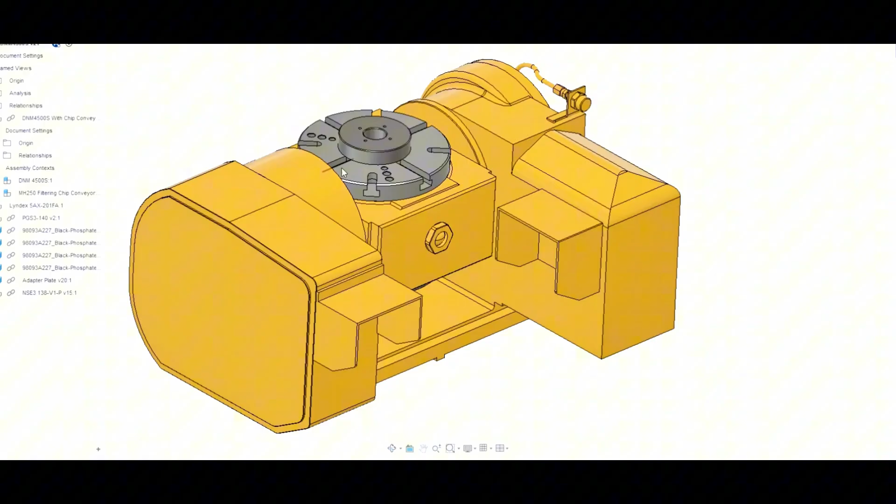So I'll just kind of walk you through how that installs because it comes as a separate item, the rotary joint, and Lyndex doesn't install it for you. So if we hide the machine here, what you'll see is the model from Lyndex does not come with a lot of detail, but there is a bolt pattern back here. And so the rotary joint comes with a spindle that slips through. It's a precision fit through the center of the platter, which is nice because it makes this boss essentially into a locating boss for your workholding adapter, whatever you want to put on top of the platter.

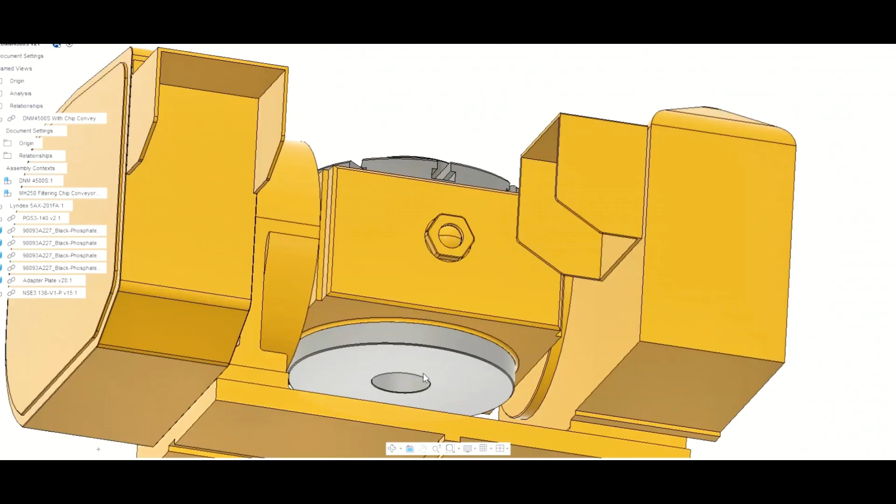Once you slip the spindle through, there's a rotary nut that goes on the backside with your four media inlets slash outlets. And then the rotary nut is held in place by a little finger. What you can't see here is that this actually has a static portion around the outside and a revolving portion around the inside. And so the static portion has a couple of bolt holes. You bolt the finger on, the finger interfaces with the rotary nut, holds it static, and then you've got four air lines coming off the bottom of the rotary nut to a little manifold block that bolts to this base casting.

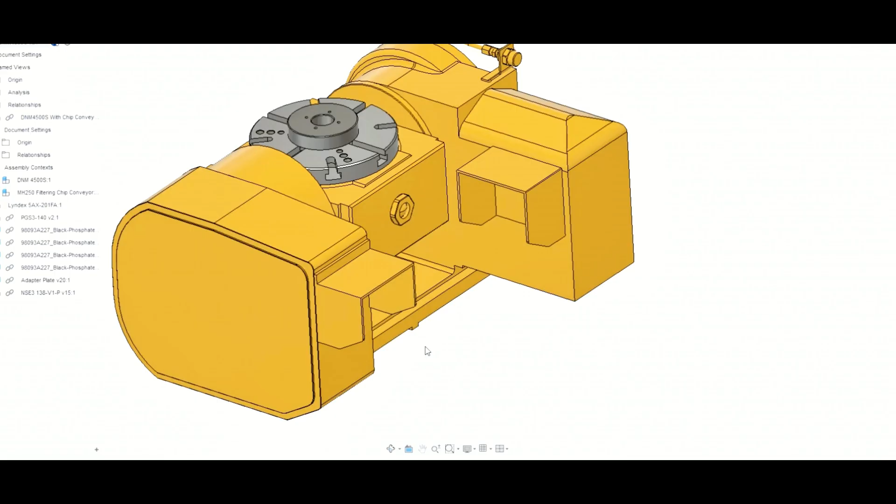And then from the manifold block, the kit also comes with a bunch of pre-cut hoses with some shields and some retractable hanging cables that bolt to the top of the machine enclosure so that any extra slack that hangs here as your indexer goes left and right is kept from getting caught under the machine or sucked into the chip conveyor. And those air lines, four of them, go up to some little nipples that are in the top of this white sheet metal here, not depicted in the model. But that's all you get from the manufacturer.

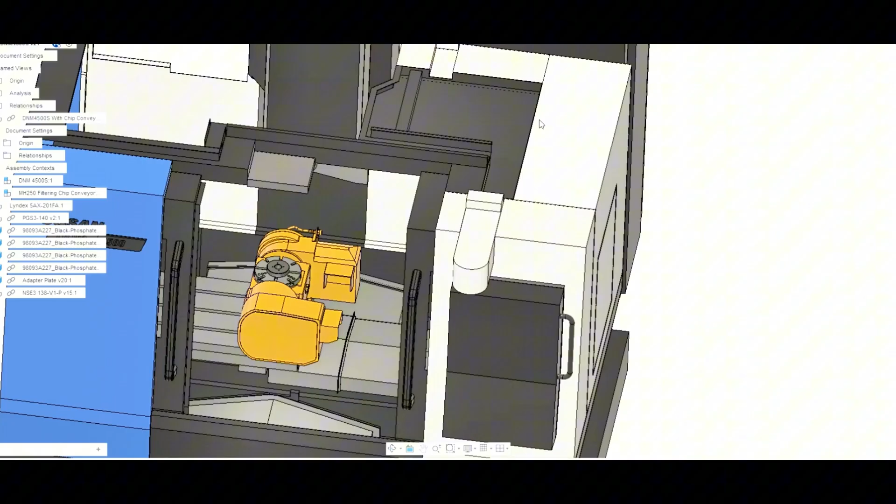So from there, it's up to you how you want to actuate it. We knew we wanted to do manual actuation initially, and that's worked really well for us. So what we ended up using was this foot-operated switch that we found on McMaster. And it's important that you buy the right switch with the right flow pattern because not just any switch will work.

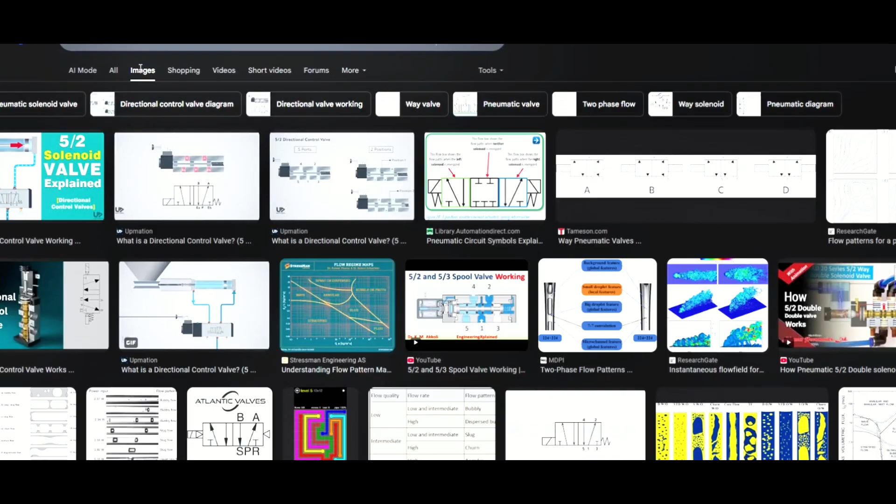So this 5-2 flow pattern, essentially the way it works is it allows one to flow while it allows the other one to vent when you press the switch. And then when you release the switch, they swap. The other one flows and the opposite one vents. And the reason that's important is because a lot of these pallet systems have a turbo function. Basically, they're air unclamp, spring clamp.

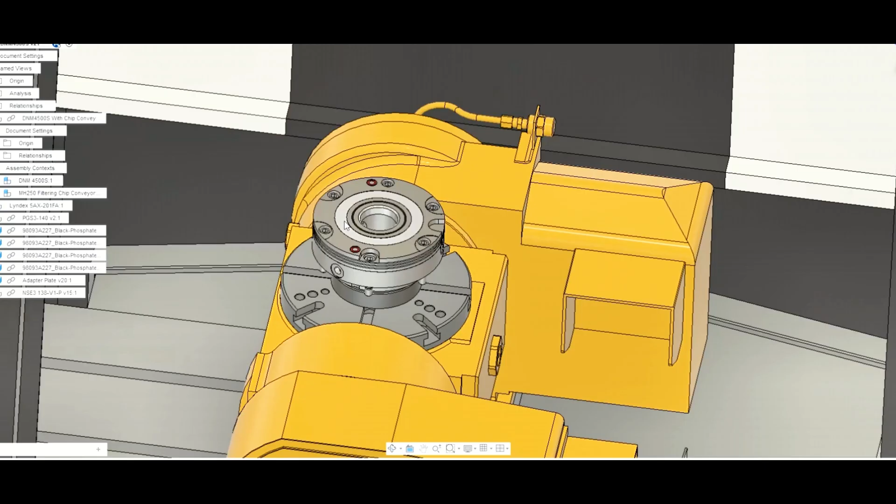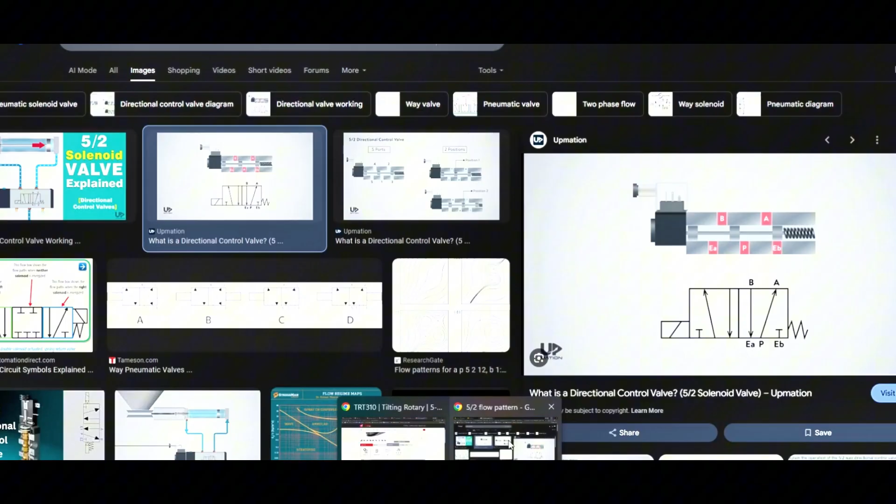But if you plumb the turbo function to the up position of your foot switch, then when you release the pedal, it actually brings in that turbo air, which introduces extra air to the backside of the platter, and it increases your clamping pressure, increases your rigidity, reduces the chances of a pullout, improves your finishes, all that good stuff. So using this switch or something with a 5-2 flow pattern is important.

So once you've run the plumbing up to the sheet metal, you can put a little manifold up here with a pressure reducer. You can bring in ambient shop air from the back, and this is what we've done. So you've got a couple air lines coming off your rotary, air coming from the back, pressure reducer, which allows you to really dial in your pressures.

We use these air vices quite a bit from Schunk, and so by specifying pressures in our setup sheets, it allows the operator during setup to climb up there with a step ladder, adjust the pressure reducer to the required pressure. And because we've used either engineering calcs or pressure gauges to know exactly what force we're getting, it is as though we've used a torque wrench on an old school CNC vise to set the clamping force for our part.

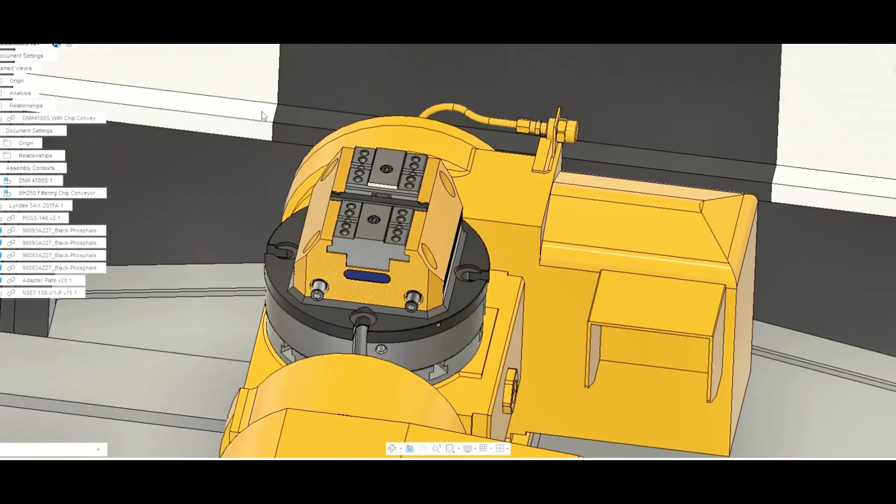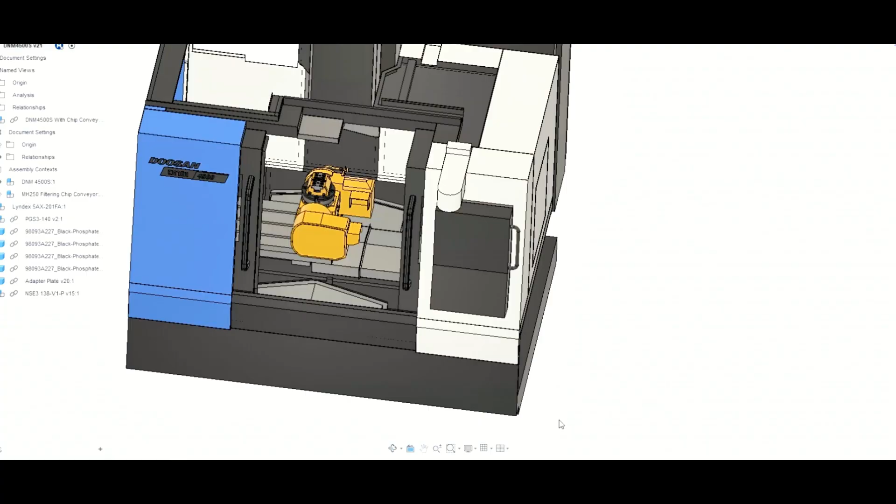And then from your manifold, you run a couple flex tube lines down to your foot switch, sits here on the floor, and it works great. We've run this for thousands of hours, tens of thousands of parts. Now, if you want to go fully automated with an M code and be prepared to integrate with a robot cell, you can do that. We've elected not to do that yet, but we plan to down the road.

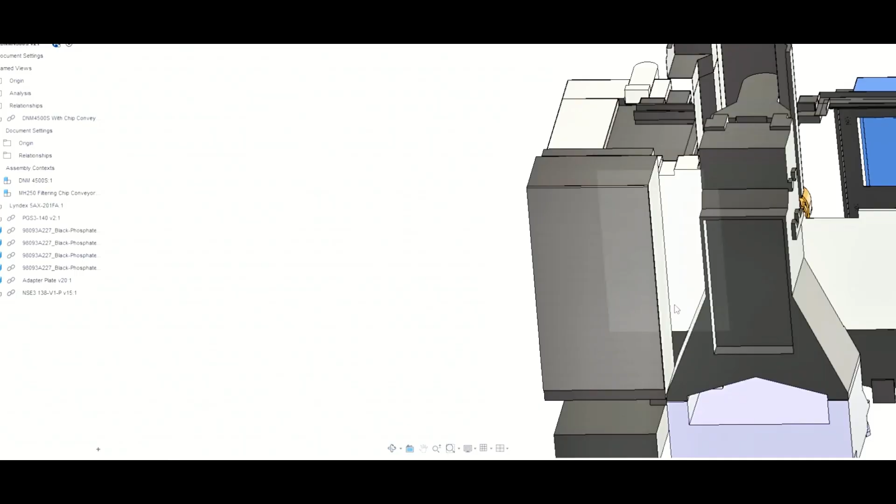The nice thing about the foot switch is there's nothing stopping you from automating in the future. So you take the system that you've already developed, you disconnect the foot switch, you run your two airlines back to the side of your electrical cabinet, and you install your solenoids, which your CNC manufacturer can help you spec out, and they are equipped to make those solenoids interface with the machine control. That's pretty much it for this machine.

The next machine I want to talk about is our Mazak VCU-500A 5X. And this is a great machine to highlight because, first of all, it is a full 5-axis milling center. So there are some new challenges associated with this one. But additionally, there was no solution provided for us by the manufacturer. So we did this one entirely from scratch on our own. And so I'll be able to walk you through that.

It is worth noting that Mazak does offer a rotary joint kit. You can buy it from the factory. I think it's a $13,000 upgrade, and it is actually field installable. So they quoted it for us at about 13 grand when we bought this machine, and they offered us, I believe it was a 16 to 20 week lead time. So we ordered it, and while we waited, we worked up the solution that I'm about to show you.

And what ended up happening was, first of all, this worked so well, we didn't feel like we needed the upgraded solution. We didn't need to spend the 13 grand. But also, after 20 weeks went by and we had heard nothing from Mazak, we reached out and there was no estimated completion date. Now, this isn't a knock on Mazak. They're great machines, but they know where their priorities are. They want to ship new equipment. They're not necessarily as motivated to send someone like me an aftermarket option that wasn't initially equipped on the machine.

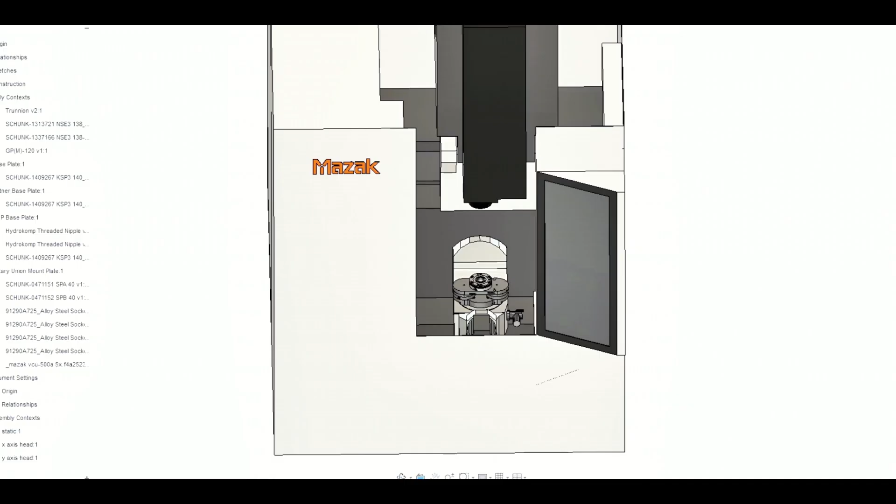So make of that what you will, but it is worth knowing that if you're purchasing a new Mazak and there is a provision for automation prep, I would highly encourage you to invest a couple extra bucks to provision it that way, because it'll save yourself quite a bit of heartache. Having said that, the machine as we received it was not provisioned with air through the trunnion.

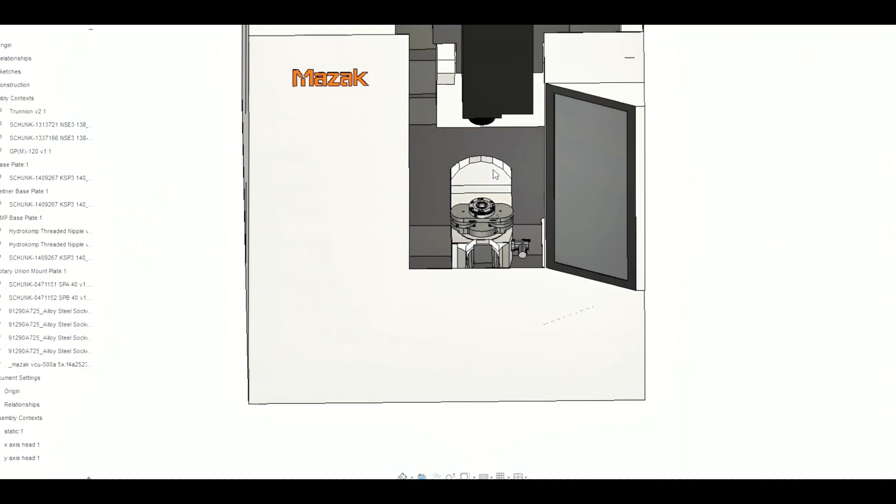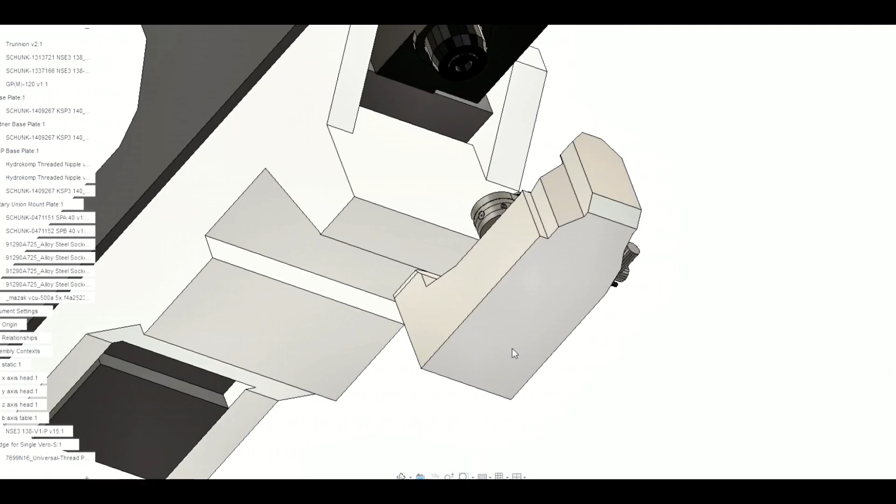Now, I don't want to get too into the weeds with this, but if you look at the actual machine, if you roll the table all the way up on its side, you'll see that underneath the trunnion there is a, let me see if I can turn this off. I don't think it'll show up in this model, and this is not accurate either. But up inside the trunnion, there is a panel here, and if you remove that panel, there is a pathway through the back of the casting and into the machine enclosure, where presumably the manufacturer would route hoses.

We didn't go that route because we weren't really interested in tearing into the guts of this machine and causing ourselves more trouble. So what we ended up doing, first of all, we needed to have a more accurate model of the trunnion.

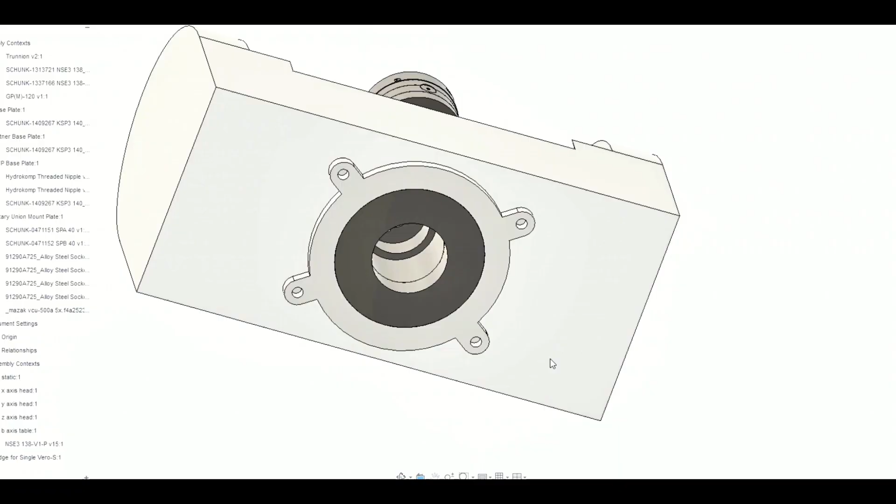So we did a little bit of reverse engineering, not fully, but we got a little closer to the real deal, some important diameters, a bolt circle that we plan to use, and I'll walk you through that later. But we also had to stop and identify what rotary joint we were going to use.

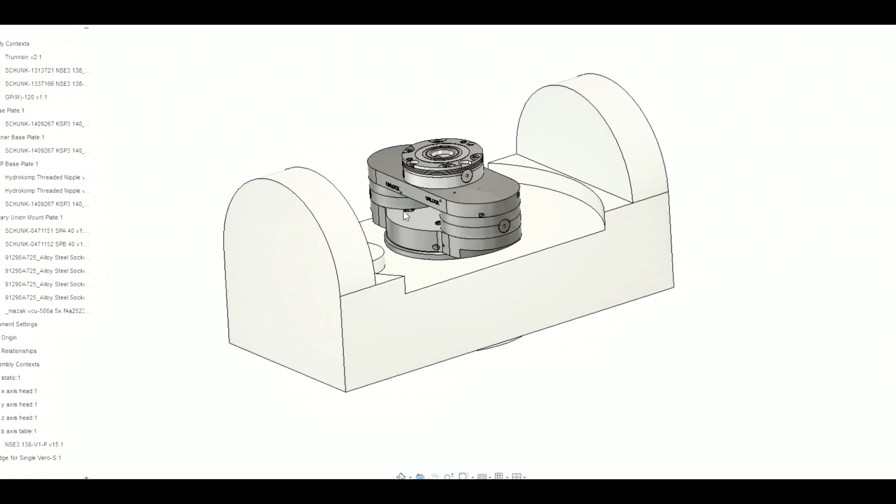Now, this is a low RPM application, right? This is not going to do any turning. It's not a turning mill. So it's only ever going to index about the platter. So we're talking a couple hundred RPM at most for intermittent movements. So because of that, we were able to find a fairly simple consumer grade rotary joint from DSTI.

And I think these guys go for $300-400, and they are on the shelf ready to buy. Super straightforward. Pressure's not an issue, speed's not an issue. And suitable media, we're using air for everything.

So we ordered this, and then we knew we had to get air from the backside of the platter up through the trunnion and into the table. So what we ended up doing was sinking the rotary joint all the way down into the hole through the platter. Because the diameter was large enough, this wasn't an issue.

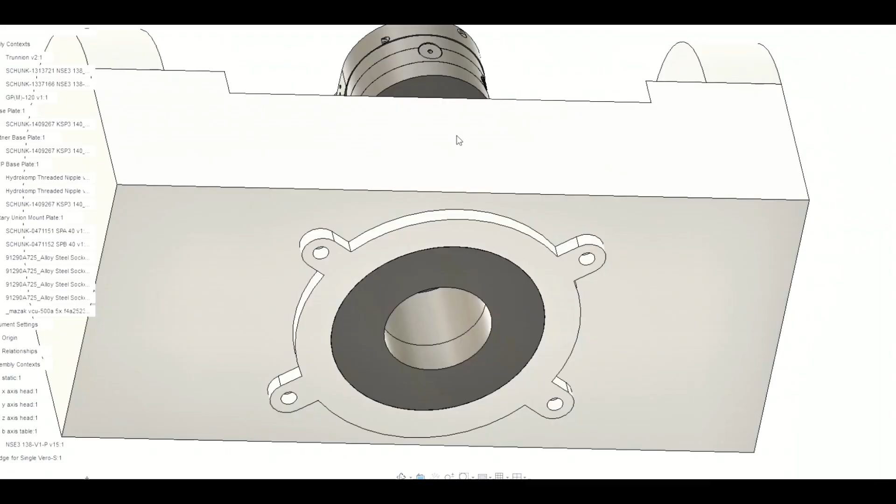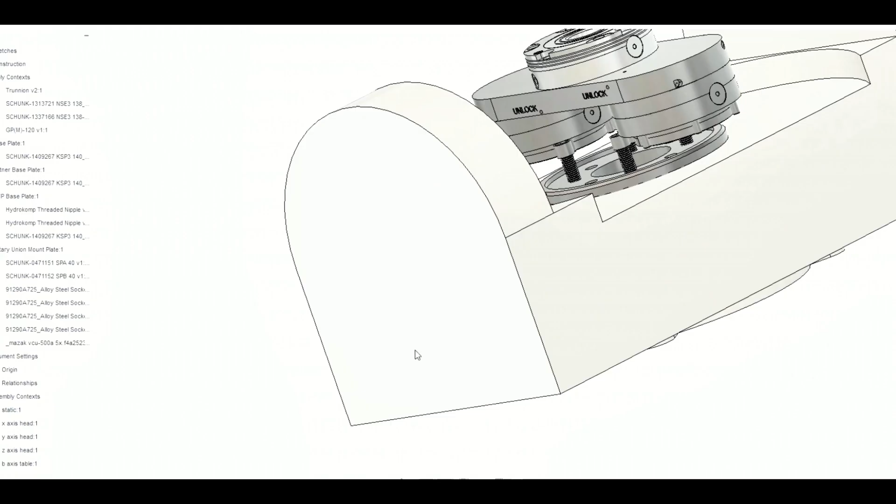So what we did was we fabricated this base plate from scratch, piece of steel, tool steel, or if you want to go crazy, you can get something hardened, but it's not necessary. This is a precision slip fit, and it's worth noting at this point, and this is really important, we did remove the factory table, and this bought us like 2 full inches in the z-axis.

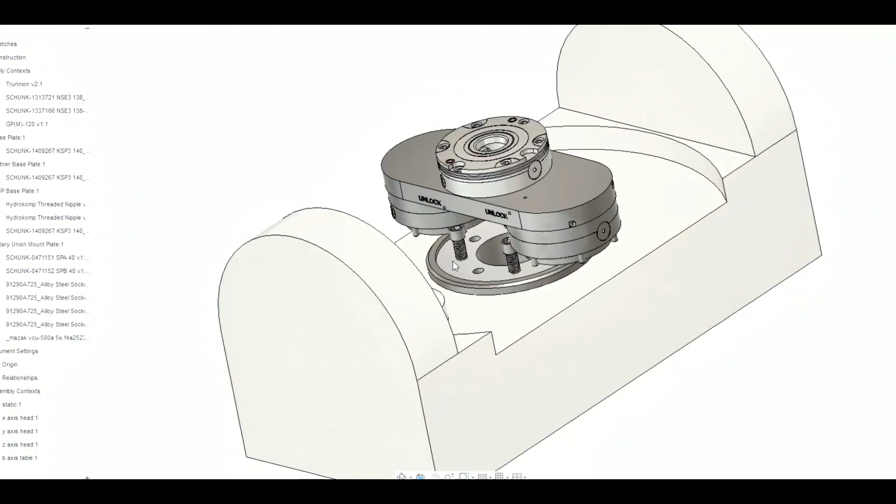So if you're planning to integrate and you know that you're going to run automated work holding forever, I highly encourage you to take a gamble and remove the existing platter, because many of these machines are not going to have exposed bearings underneath the table. They're going to have some kind of pocket like this. And there's no reason not to gain yourself a couple inches of Z, some rigidity, and ultimately Z turns into X, right? When you turn this thing on its side.

So this machine is actually more X limited than it is Z limited. So by slamming the part as low as we could, we got closer to the center of rotation, but we also kept our taller parts away from the left-hand limit of the machine when it's fully indexed in the B axis. So yeah, we made the base plate, and this is the challenging part of this project. I know that might sound crazy.

Hang on, I gotta turn some stuff off here real quick. You go away. And all right.

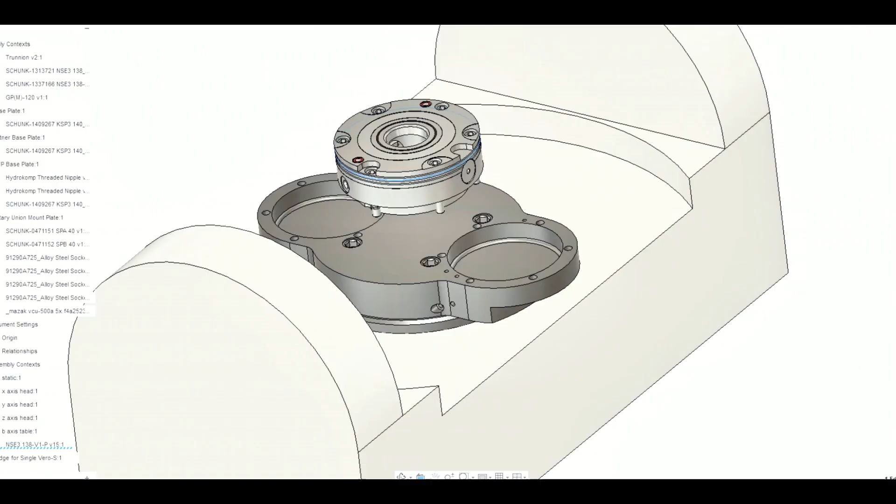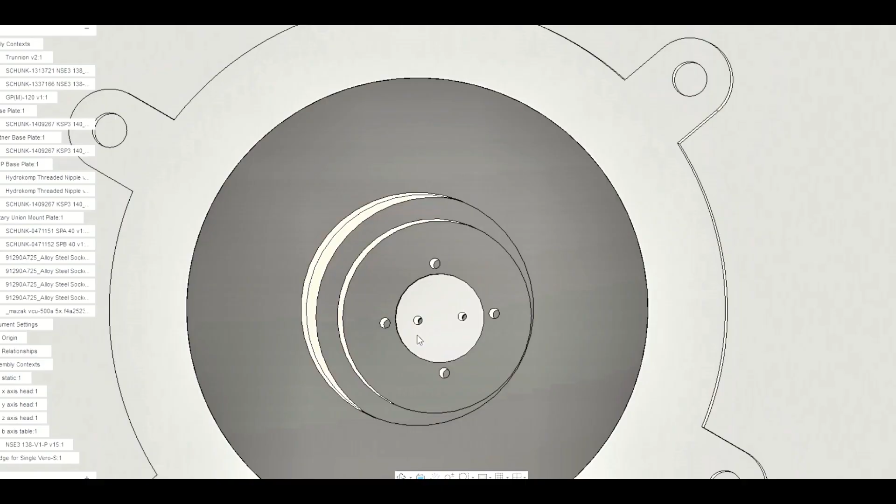I know that might sound crazy, and if you're used to deep hole drilling, gun drilling in your shop, then pay this no heed. But for us, these long cross holes to get air from these ports where our rotary joint had like a flush interface with O-rings out to the holes that actuate and vent our Schunk pallet bases was a huge amount of work.

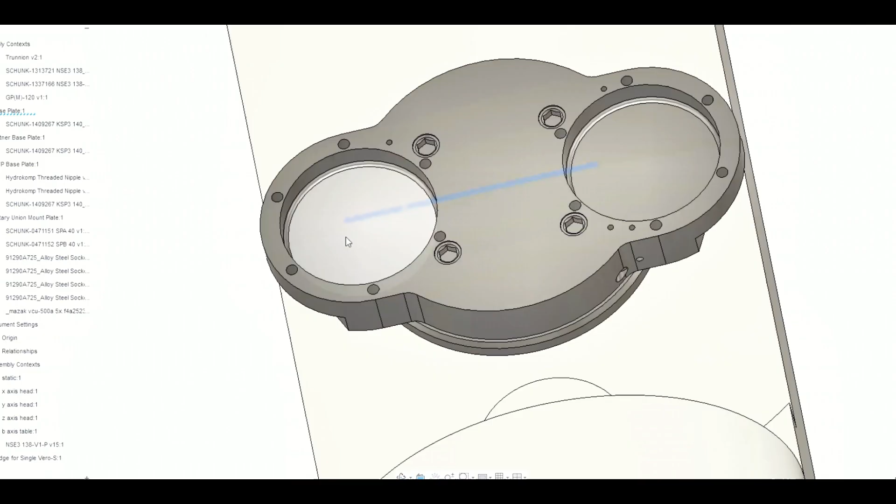But basically what we ended up doing was buying some gun drills off of McMaster. Obviously you have to pre-start the gun drilled holes. And I think our deepest hole here was, I don't know, 8 or 9 inches. But yeah, pre-start them with a nice carbide drill, mill yourself a flat if it's on a round surface, go in with the gun drill, obviously with the spindle off, and then follow manufacturer's specs for the drilling process. But the cross drilling was the tricky part.

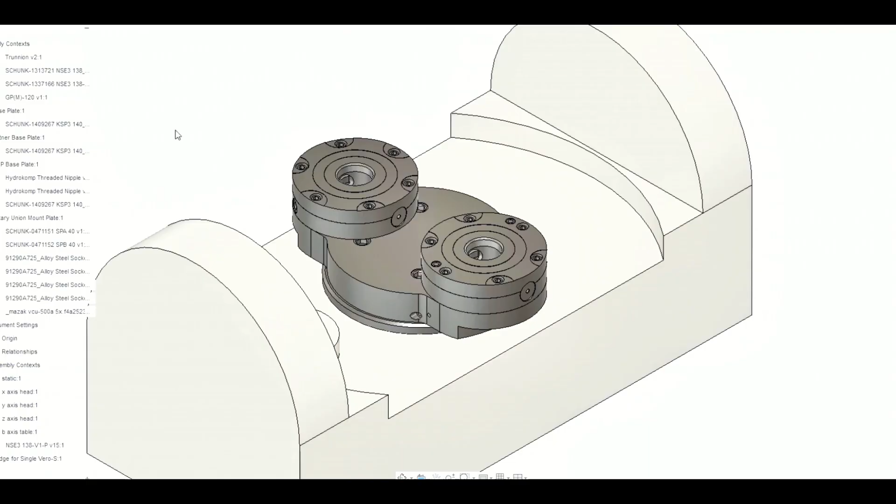But we fabricated this base from scratch, and it allowed us to put 2 Schunk pallet modules, which really makes this machine more flexible because it does have a 24-inch max part diameter. And so we wanted that rigidity that came with the 2 pallets, and that's allowed us to run all kinds of different projects on this machine. So at that point, we had the rotary joint up inside the machine, but no plumbing coming down.

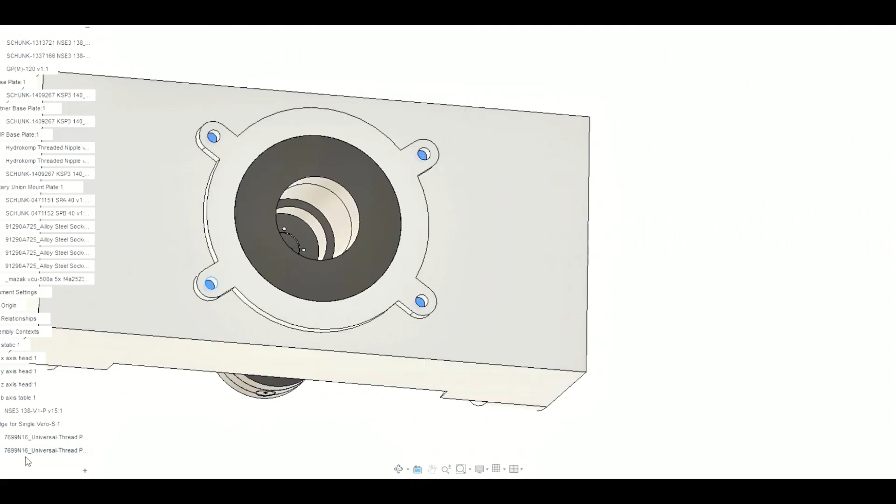So then what we did was we took this bolt pattern because this was the only static bolt pattern on the back of the machine that we could find. And these are massive, like M10, M12 threaded holes. But we just made a very simple mount plate, nothing special, piece of aluminum, bolted it to the back of the platter,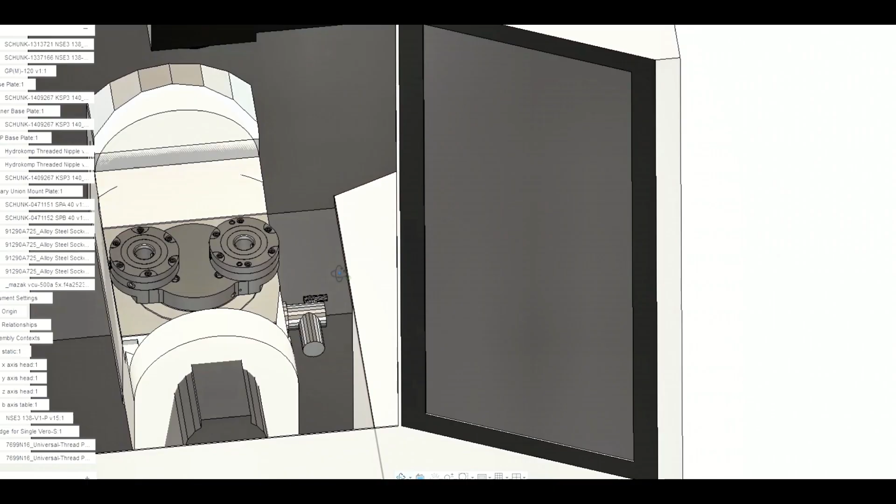and then the rotary joint, we had a couple of stainless steel nipples coming off the bottom of it that protrude just barely through this plate, and we put 90-degree elbows with quick couplings and then flex hose, and we took that directly to the right with very little extra slack so that when the machine is tilted all the way to the left, the hose doesn't even touch the sheet metal enclosure. There's no issues of like chips or chip conveyor or anything like that.

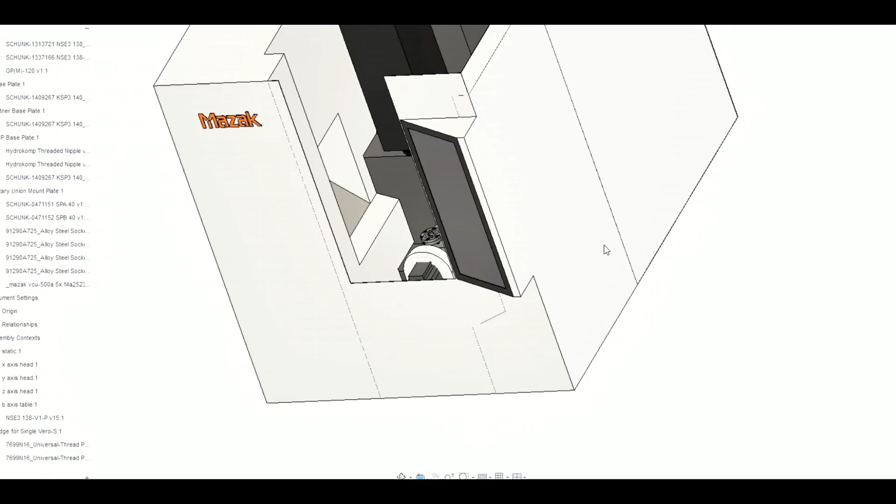And then we just drilled 2 holes in the side of this panel, and we brought our air out through there down to our pedal, and then brought ambient air in from the back. And we use this exact same foot switch from McMaster.

So all told, this project probably took us 2 days, $600 or $800 worth of parts and hardware. Very simple, very painless. And again, this has run for 3-4 years, many thousands of parts. So this is a great solution.

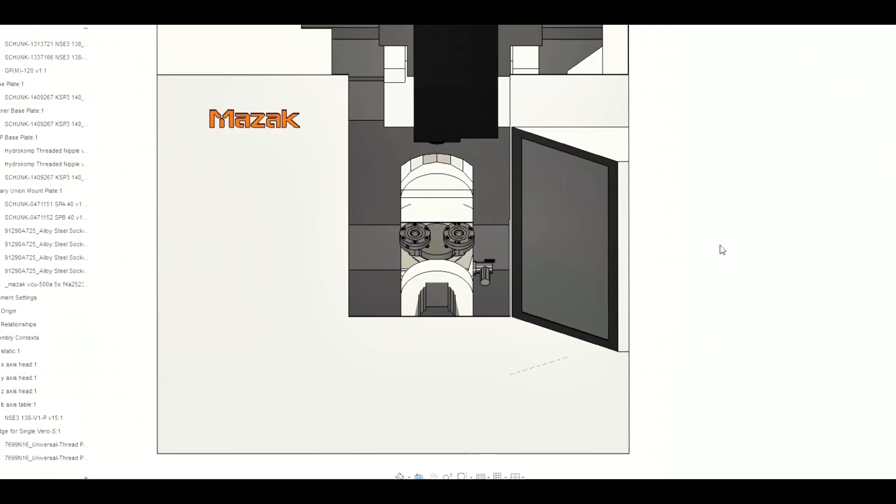And again, same as on the D&M, if we wanted to fully automate this, we could either take our existing plumbing, it wouldn't be the prettiest thing, but run air along the sheet metal back into the enclosure and into the electrical cabinet, and then work with Mazak to interface with solenoids. Or we could go ahead and take the leap, maybe get a Mazak tech out here, tear into the panel on the bottom side of the trunnion, and route our air hoses through the back of the machine.

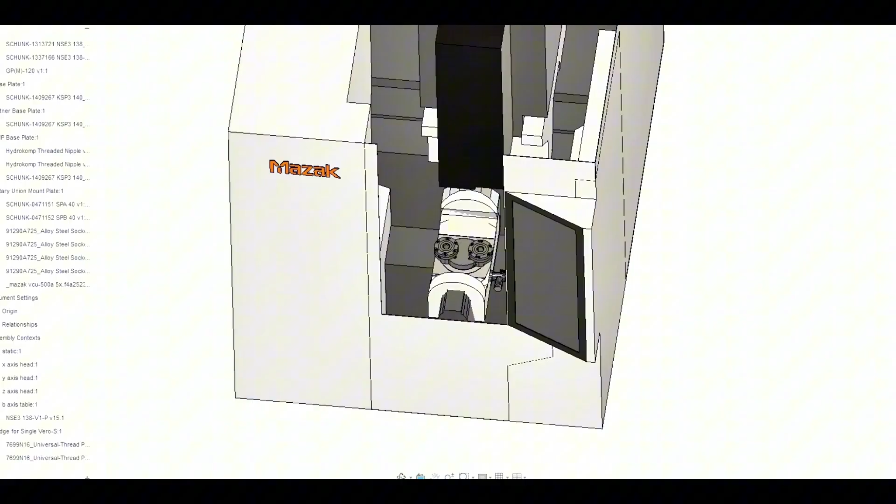But this approach of doing it all yourself is surprisingly doable for most machines. All the manufacturers I've worked with do a really good job of providing models and drawings. To get more detail about the backside of this table, we found the pages in the manual that specify kind of what the back looks like. So we didn't have to do as much hand measuring.

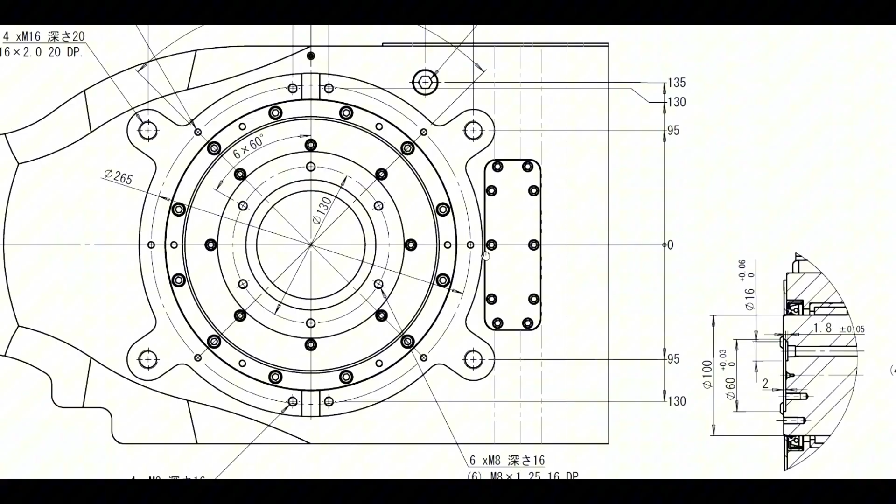But this is that panel I was telling you about that would give you access through the trunnion into the back of the machine if you wanted to go that route. So yeah, that's how we automated our Mazak, and that's it for this machine.

The next machine I want to talk about are these Brother M series multitasking machines. This is not a machine we have on our floor. This is actually an ongoing collaboration with Brother to try to provide some integration to make this machine more appealing for various customers. But the reason I really want to present this to you is because this is a mill turn. And so we are dealing with higher RPM.

The smaller size, the 200, goes up to 2000 RPM. The 300 goes up to 1500 RPM. And so while it does introduce another layer of cost and complexity, it's still nothing that's going to keep you from doing this yourself if you have one of these machines and you want to automate.

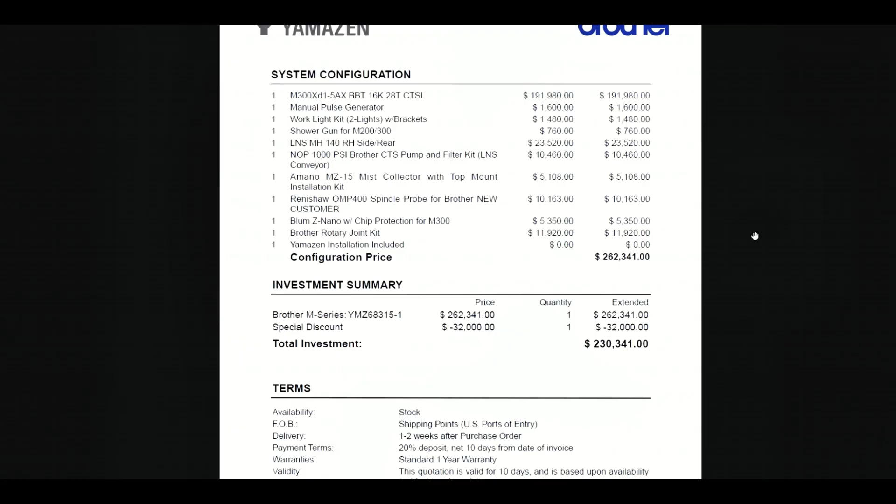So much like Mazak, there is an automation solution available. It's $12,000, and it's not really set up for the kind of work holding that most U.S. customers want to do. It's air and oil. I think it has 1 air passage and 3 oil. And there's some other limitations associated with it, but it wasn't ideal for customers who are running Schunk, Fifth Axis, SMW. Most US customers are not automating with hydraulics through the platter. So we really wanted to be able to provide a new solution.

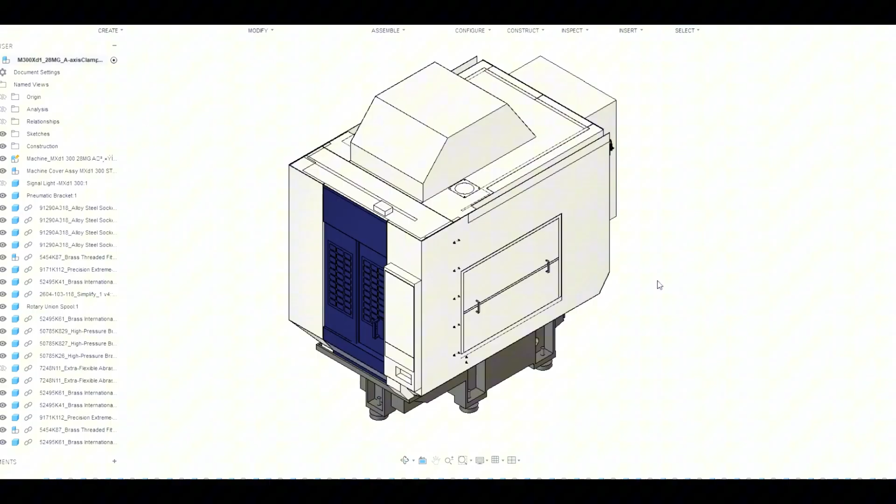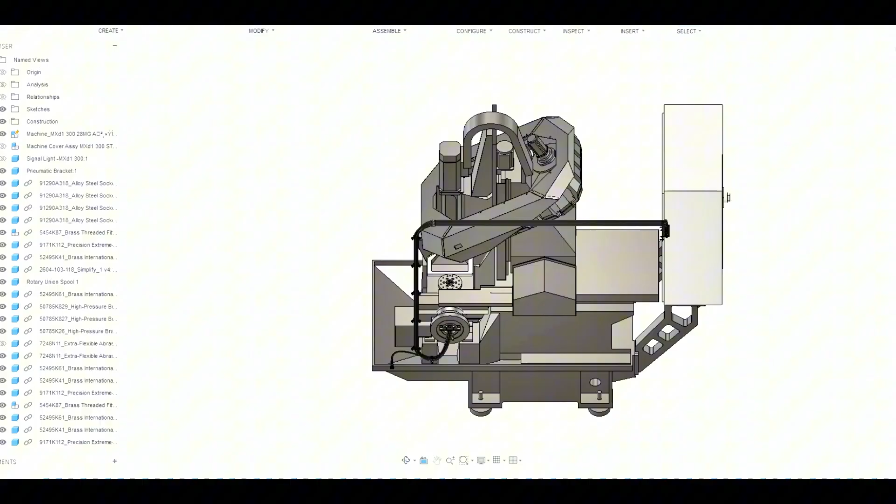So here is kind of what we've been working through with Brother in order to put Schunk on people's machines. So if I strip away some of the layers of the machine, you'll see I've got a lot more detail built out on this than on the previous machines because this is an actual live proposal. But the strategy is very similar. We've already gotten the layout of the plumbing from the current off-the-shelf rotary joint kit.

And we felt that was important because we didn't want people to have to change their adapters if they were switching either to our product from the old kit or vice versa. We wanted everything to be interchangeable. So we were able to pull from the Brother literature the pattern of these tubes and even the height that they rise to and what their diameter is and all that good stuff. And we were able to recreate the exact same thing with these steel risers, but using a rotary joint that we had spec'd out ourselves.

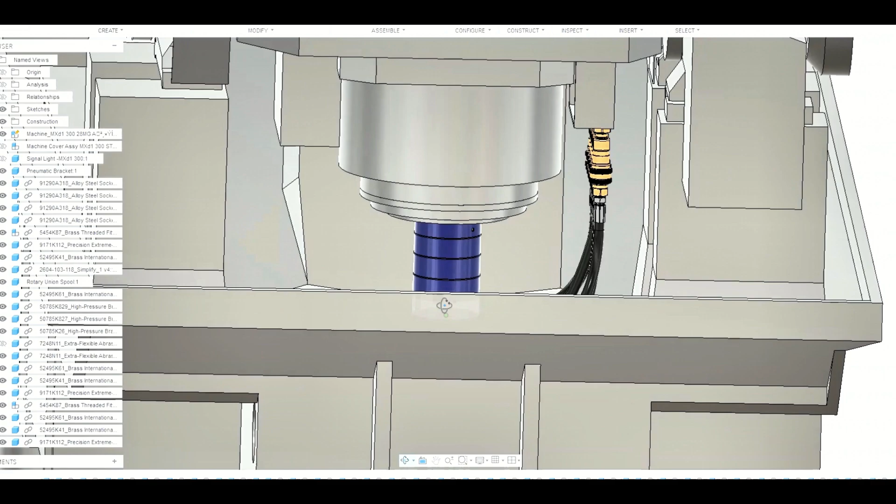So we ended up going with a company called Deublin, and it was very difficult to find a rotary joint that would do this: 2000 RPM sustained with 4 passages of air. And we went with 4 again because it matches the current kit. So we felt like it was a superior offering.

Additionally, if you want to do more than just clamp unclamp on one pallet or one vise with this machine, you can do that with 4 channels. You can clamp unclamp, you can do air sensing, clamp seat confirmation, or you can even clamp top tooling and then pass air through a pallet to a vise. So you can actually have 2 different clamp unclamps with foot switches or with associated M codes. Kind of the sky's the limit.

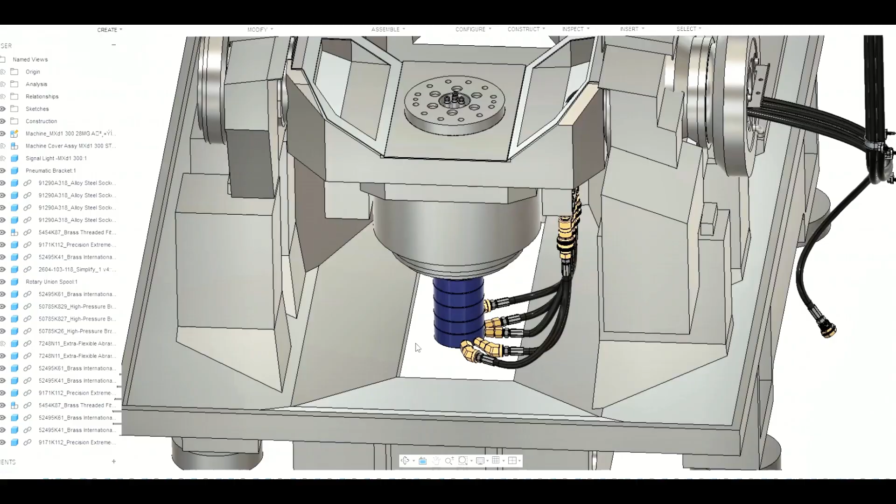And because all of these are plumbed, and I'll show you in a minute how that's done, but they're plumbed to the back of the machine, that kind of makes it infinitely configurable because all of your adjustment, if you decide, hey, I want to make this one a foot switch and this one an M code, you just have to come back here and replumb these 4 lines without really getting your hands dirty.

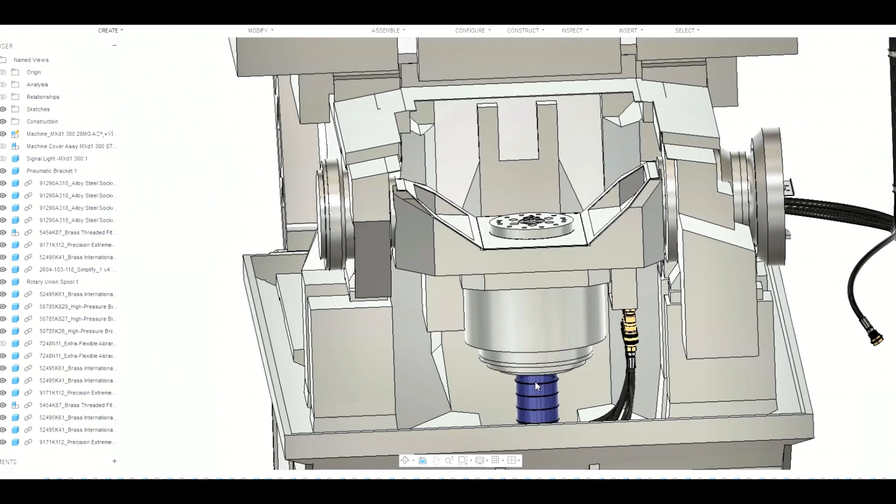So the rotary joint from Deublin is about $3,800, $4,000. The lead time was like 8 to 12 weeks, nothing too crazy. The rotary joint will probably get to you before your machine does. And these are German made. They are rated for up to 3 or 4,000 RPM, and they definitely exceed the pressure requirements for any shop running compressed air. But then after you get your rotary joint, there is some fabrication involved.

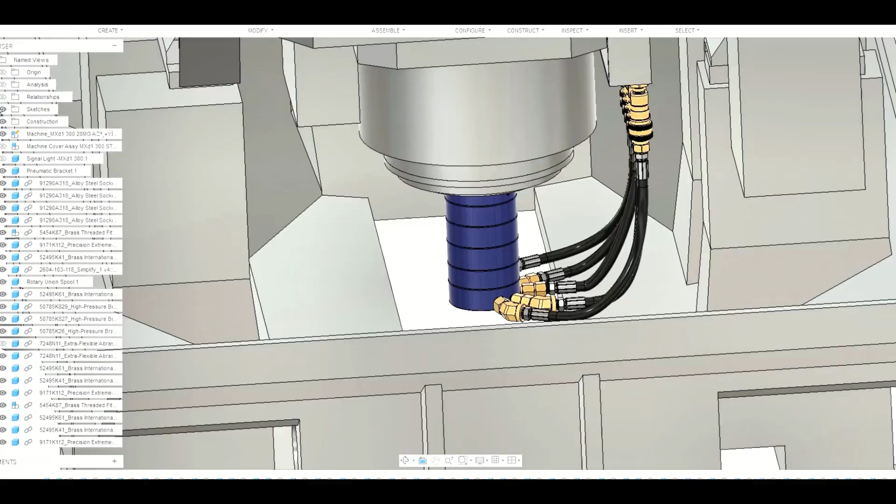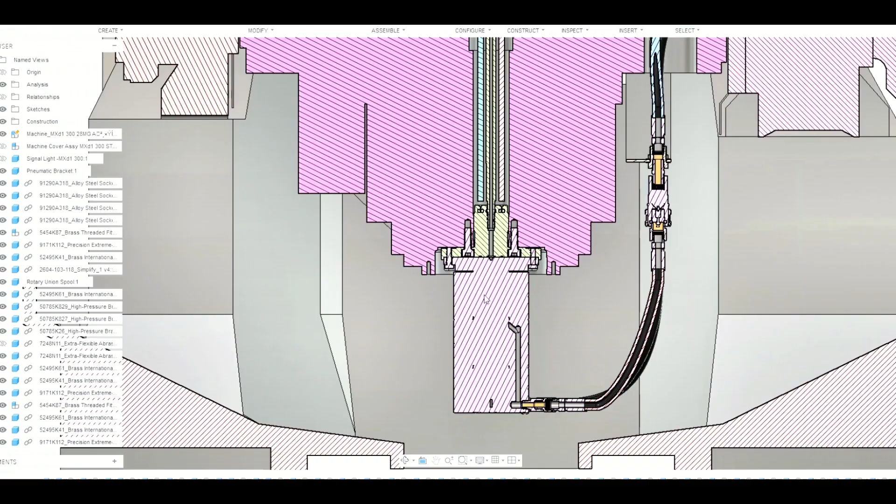Let me see if I can turn on a cutaway view here. So the rotary joint comes with this faceplate. You have to fabricate this spindle here, which is not as complicated as it seems, but it does interface with the precision bore of the machine, and it does interface with these riser tubes. Now, if you did this yourself, you would not have to do all of this finagling.

If I were doing this for myself and not to match a current spec, what I would probably do is this spindle, because steel is cheap, I probably would just continue this spindle all the way up, have it end flush with the table, and install a couple O-rings on the holes coming out of it. That would be much simpler than having to fabricate these 4 steel tubes, get all the fits right, find all the O-rings. But it really is just a flange with a boss in the middle and 4 holes.

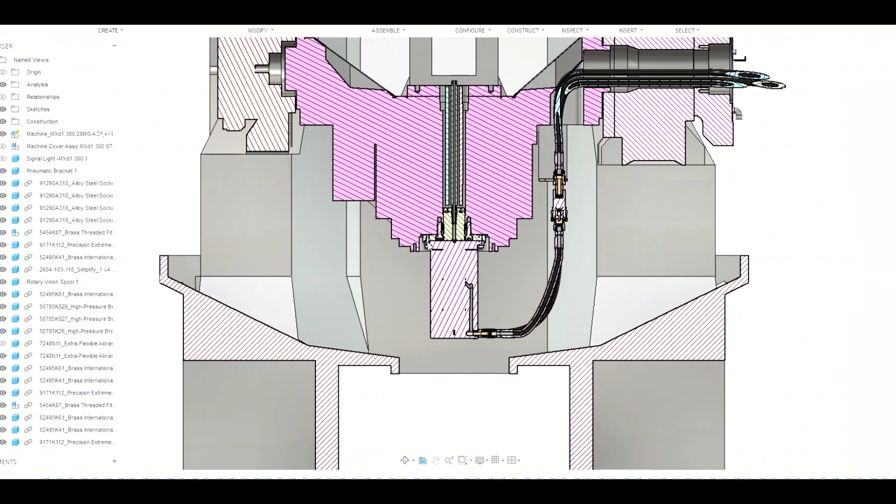So once you've got your spindle, with the adapter flange and your rotary joint on the floor, then the only other fabrication here is some kind of bracket that bolts up under the edge of the machine platter. The machine does come provisioned with these 4, I want to say they're M6 holes, and we plan to just bend sheet metal. You can do it however you want.

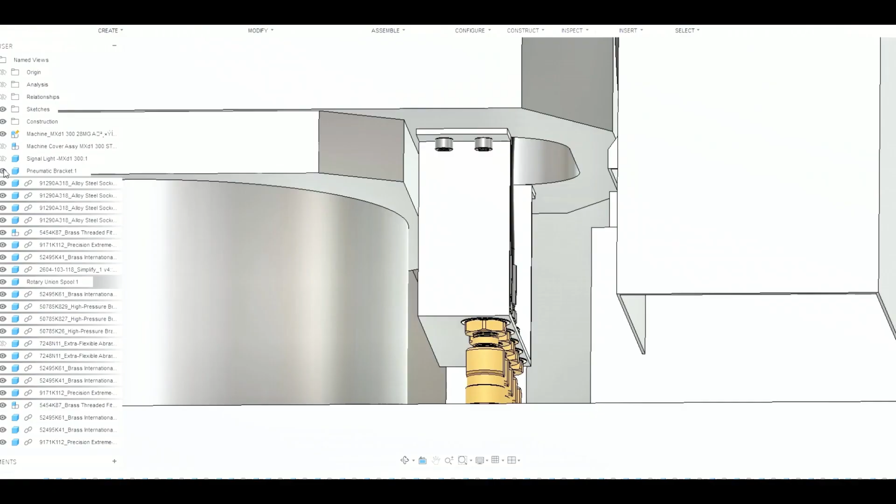We also went with quick couplings here so that maintenance would be easy, cleaning would be easy, troubleshooting would be easy. And we went with all high quality abrasion resistant rubber hosing from a local pneumatic supplier and all brass fittings. You can do this however you want.

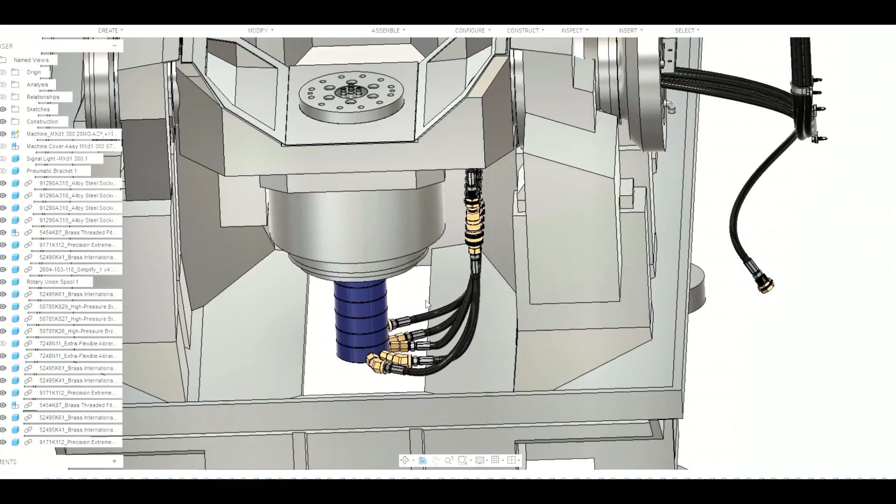If you just wanted to use push to connect hosing and you didn't want to make the bracket, you just wanted to run it through the trunnion, wrap it in some abrasion sleeve, and bolt it to the side of your machine, you could do that. And it would probably run for thousands of hours that way. And if you pop an airline, hopefully you don't throw a part, but you can go this route, kind of fully built, high quality, or you can go kind of turnkey MacGyver style.

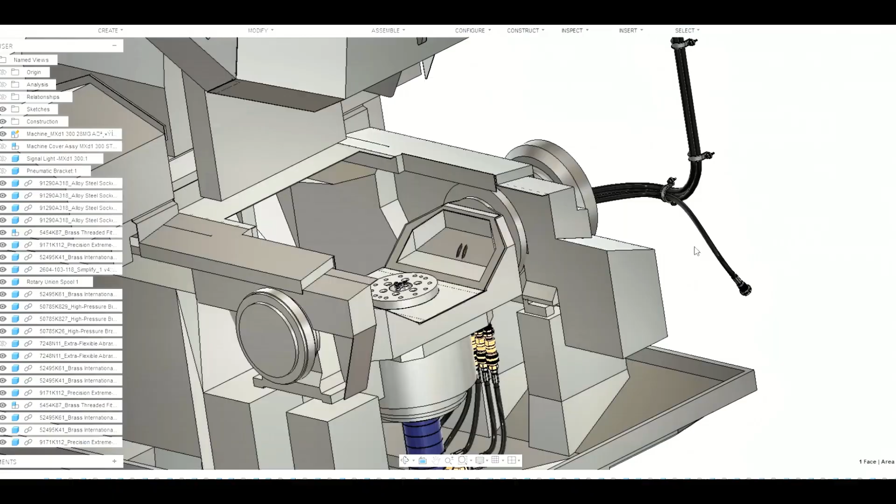And then after that, it does have a vent, not really necessary, but it's part of the rotary union. So we went ahead and plumbed it just to be safe. And then we found these little brackets on McMaster. They're nothing special, just pieces of plastic, sheet metal screws into the machine enclosure. And then the machine does have a, where'd you go? I think I just lost my machine in the mess.

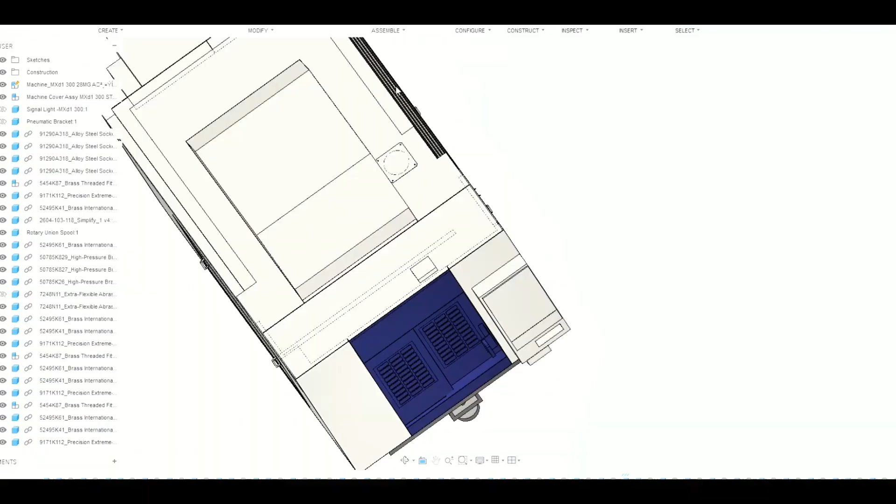Yeah, the machine does have a trough here that's designed for these hoses. So this is how it would be run if you bought the OEM kit. And then again, another fabricated bracket. You don't have to do it this way. If you like dangling hoses, more power to you. Duct tape, whatever.

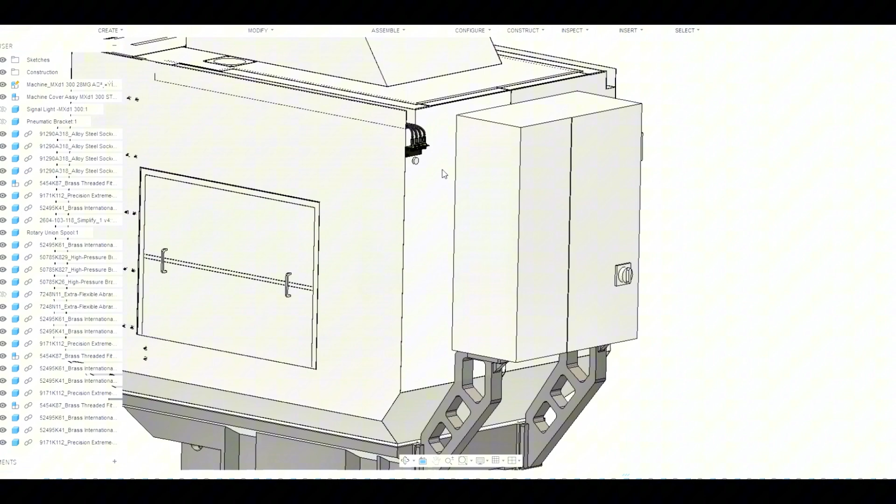But at the end of the day, now you can choose whichever two you want to use for clamp unclamp. You can plumb your foot switch the same way we have, back under the machine enclosure, and go to town. Or if you want to automate, this machine has spare buttons on the control, lots of spare M codes. You could integrate all four of these into the machine, and then I'm sure you could talk with your local machinery seller about custom mapping these so that you could change a few parameters, change a few settings, and maybe make two of these be clamp verification, part seat confirmation, or make it be a second clamp unclamp for tooling that is like air pass through on top of a pallet.

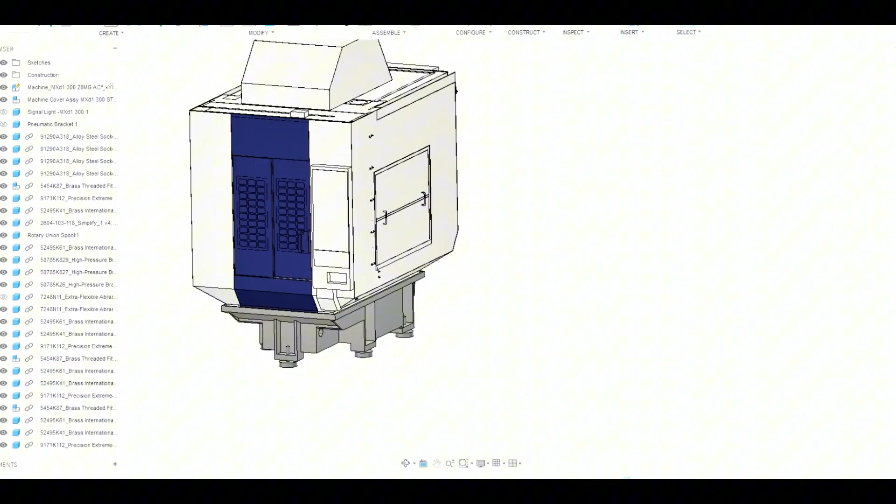But this is a really cool project. There's a lot of machines out there like this where either there's no solution or there is a solution, but it's not great, and someone needs to build one, which is something that we're hoping to do in the future. But hopefully you guys find this helpful. And that's it for the Brother.

Well, I would be remiss if at some point during this video I didn't talk about HAAS. I don't think you guys need me to hate on HAAS. There's plenty of people out there doing that already. The truth is, if you're a budget shop or a startup, or if you're doing light duty work, HAAS is great. They make good stuff.

A lot of their stuff is still US made. Their support's good. Their integration is phenomenal. Their tooling line, I know they're actually buying a lot of quality brands. Some of it's cheap, some of it's nice, kind of hit or miss. I've heard stories about spindles falling out of HAASes, UMC 500s, but I've also heard stories about people running HAASes

for 30 years. We have a VF2 on our floor that we bought in the mid 90s, and every couple of years something fails, we replace it, and it's still kind of our mold and die shop workhorse. So I'm not going to hate on HAAS. They make a lot of good stuff. But here's the interesting thing.

HAAS does have their own zero point and pneumatic vise system, and it looks like pretty cool stuff. It's not anything like Schunk or SMW, Fifth Axis, Lindex, any of the other big work holding companies out there, but it's a zero point. It's cheap. It's decent. It looks nice. However, their integration and their offering and their support is extremely limited.

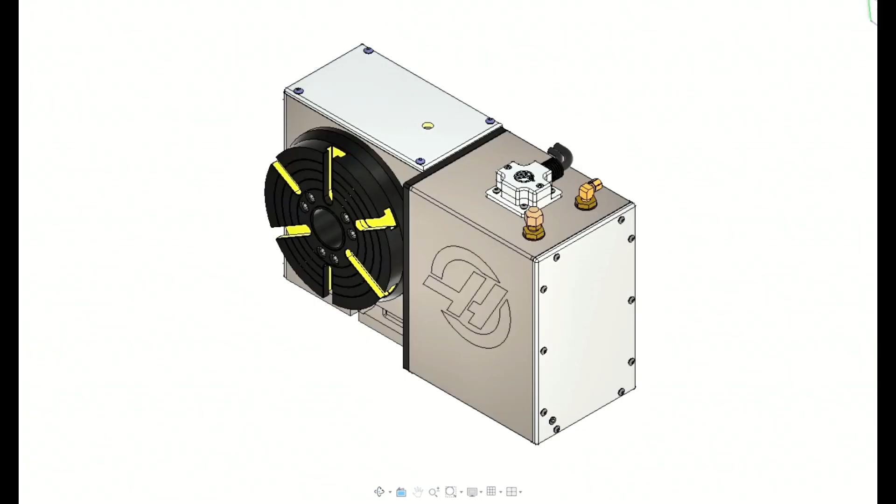So obviously, the fourth axis rotaries are the easiest because you don't have a trunnion to battle with. They are not provisioned for it in any way that I can clearly discern, but we've done this. We actually have a HRT 310 on our VF4 that I plumbed for air, and I put a Schunk pallet on the face. I actually removed the faceplate, made my own, again, trying to save space and rigidity, and we plumbed it for air. We put a Schunk platter right on the front, and we've run all kinds of parts on that thing. So it's a very easy process.

If you don't want to discard your OEM platter, that's no problem. All you have to do is make some kind of adapter that will interface with this precision bore. And of course, the bore diameter is going to change for each rotary size. And then use T-slots to bolt it in place, get it all dialed in, and then install your work holding on the nose.

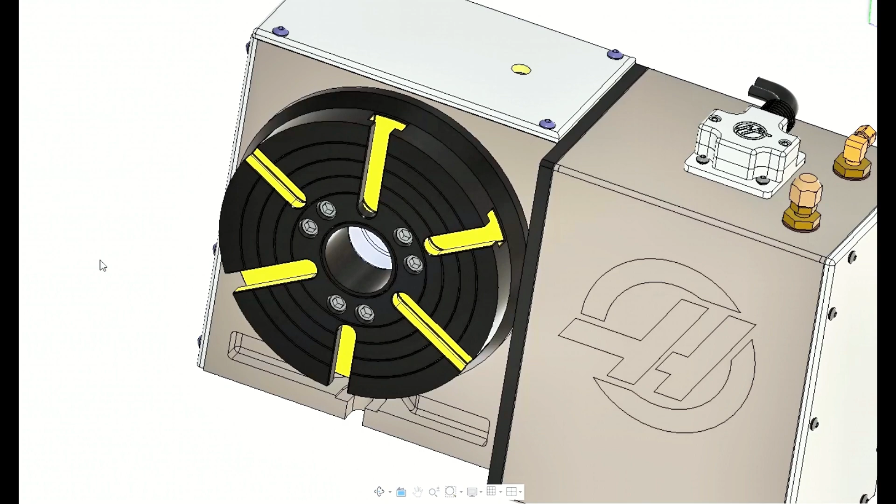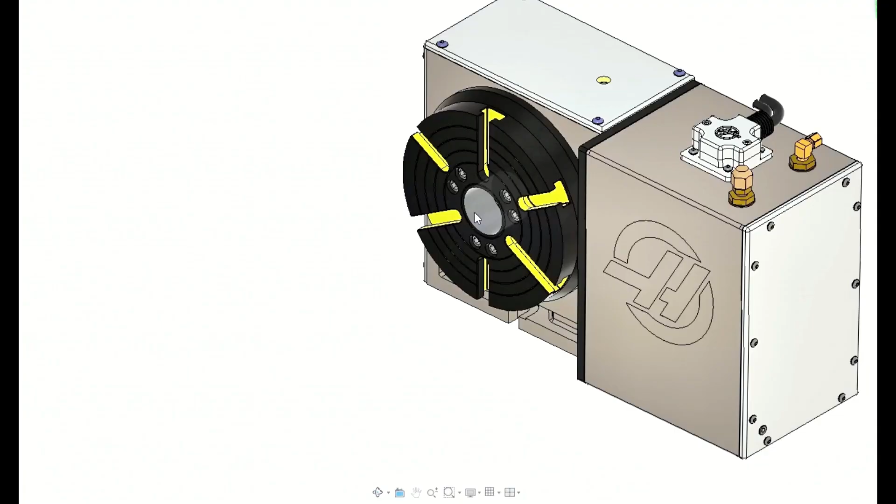This may not be ideal for everybody, but if you want to reach four sides of your part and you're willing to palletize, going with a Schunk Vero-S or something similar on the side of a rotary can give you tons of access to your parts. Or if you have something long and you can hang it between a pallet and a steady rest, or if you have a little tombstone, right? All the kinds of things you can think of can be done with air through a rotary.

So the process is simple. Once you've made your adapter with the air provisions and the holes in the back, you buy that same $200, $300, $400 DSTI rotary joint that I referenced earlier, talking about the DNM, and I'll put that link in the description here. But you install that thing in the back. You need to obviously give yourself some risers or nipples coming through the platter if the rotary union won't fit down inside the hole.

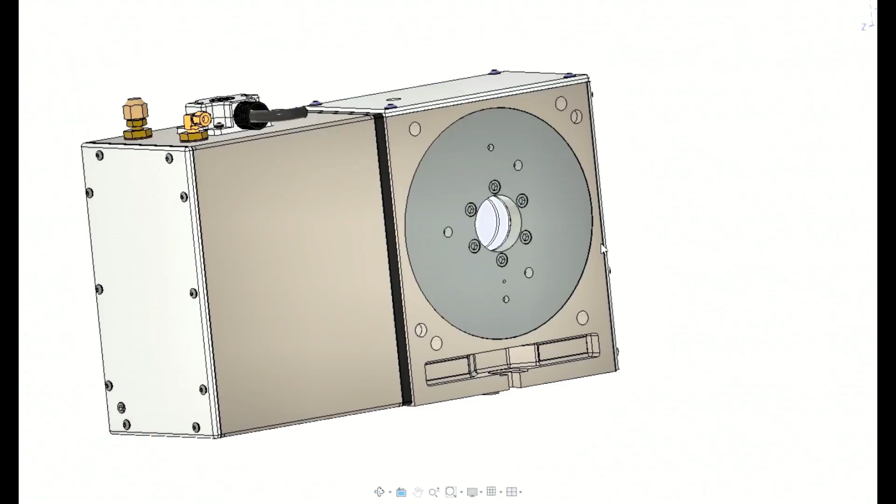The other thing that's worth noting is that with these rotary joints, the incoming plumbing is on the outside of the rotary joint body. And so if you're planning to put it up inside the bore, you have to remember that you're also going to have to deal with your 90-degree elbows coming out of the sides of your rotary joint. But at any rate, once you've done that, it's not hard.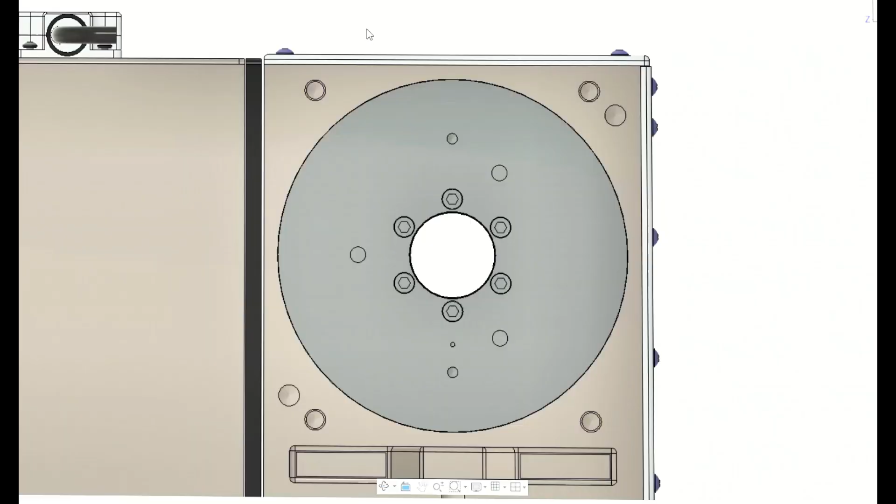I don't think this is accurate. I haven't checked this model, but usually they do have some threaded holes on the fixed portion of the rotary that you can use to make some kind of cross bracket to hold the stationary side of the rotary joint in place so that as the platter spins, the backside remains stationary and your tubes don't get all twisted.

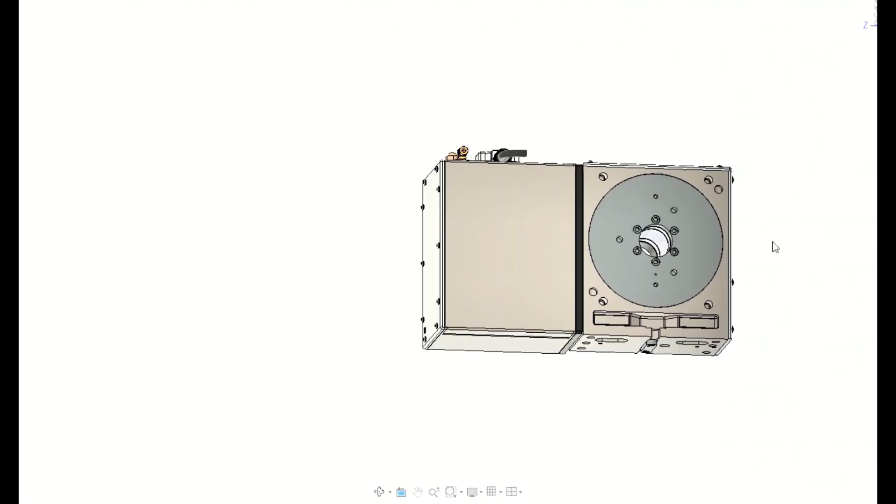But after that, it's kind of all the same stuff we've discussed. You're talking about running a couple air lines up and through the top of the enclosure, which HAAS usually has an opening there already, which is probably what your cable for this rotary is running through. So zip tie it to that bundle, get your slack figured out, run it to an adapter, a manifold with a regulator, put in a foot switch, take it to the machine control.

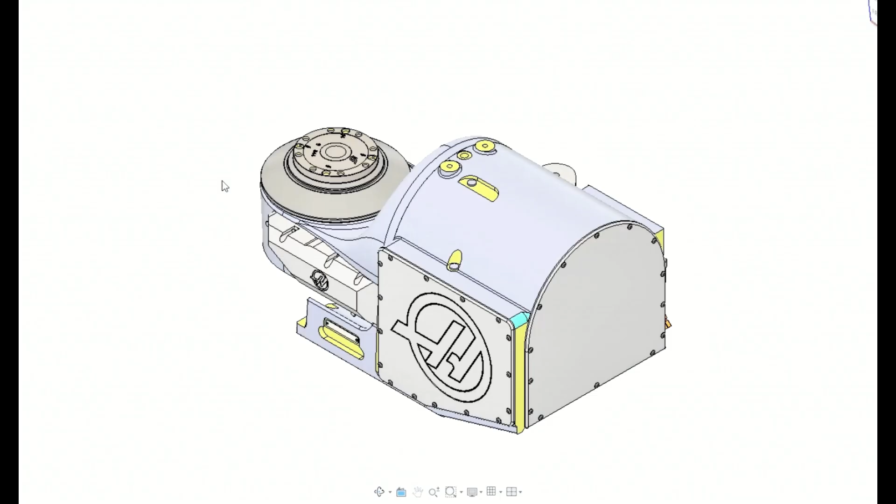But this is a very simple process. You can automate one of these HRTs for less than $1,000 in a day if you know what you're doing. And then the TRTs, obviously we talked about the 210, right? This is the magical one that's kind of already set up for automation. And here's what HAAS's zero point looks like.

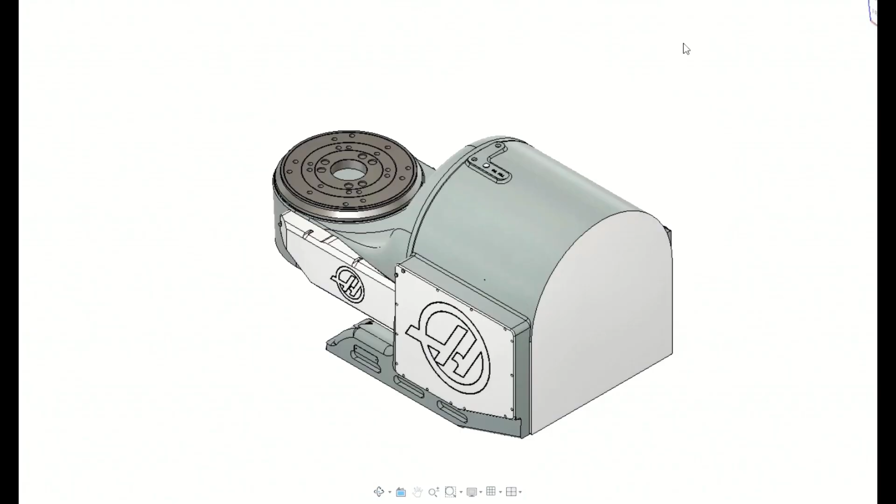But any of the other TRTs, so let me pull up, let's go up a size. TRT 310, it is provisioned for air through the trunnion, through the rotary. So you got your aux1, aux2. These are plugs, threaded plugs. So you bring your media in from outside the machine, and then those come out here.

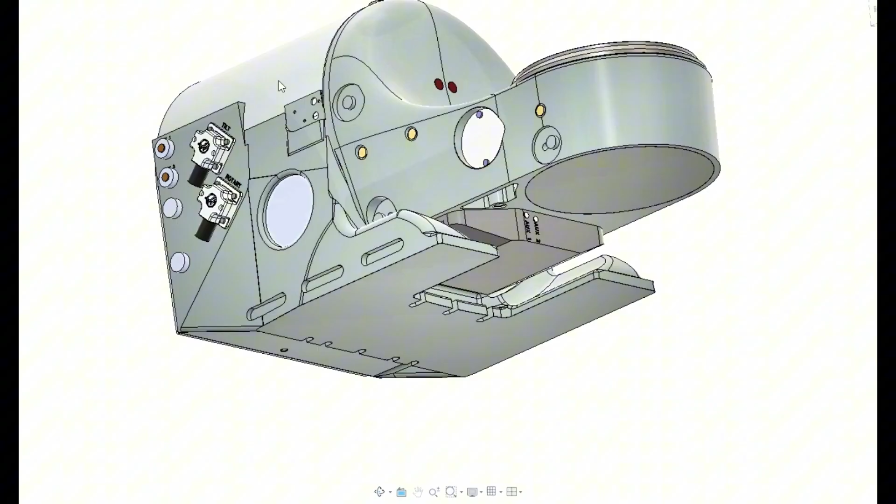So you've kind of already dealt with the B or the A rotation, depending on how you orient this thing, because the air is plumbed through the inside. And then you really just have to kind of build your own version of this. It's not complicated. And HAAS has elected to use the rigid copper or steel tubing to hold the stationary side in place.

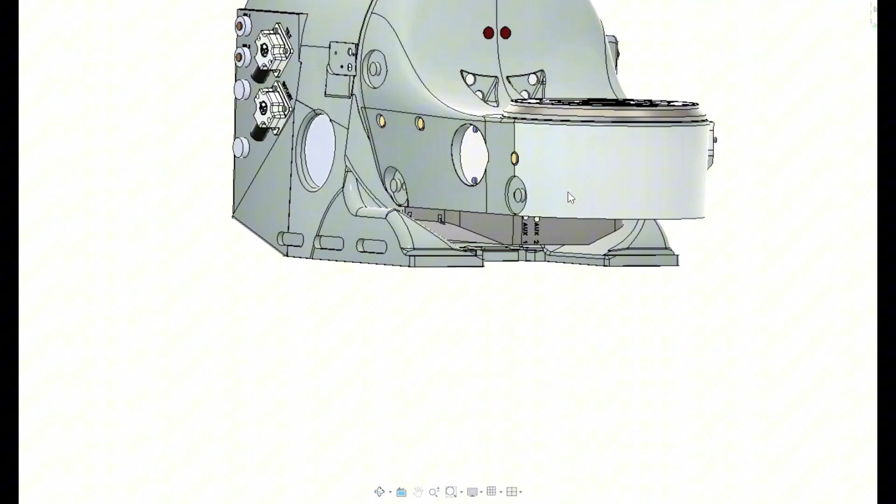I don't love that, but I'm not enough of a professional about this to really know whether that's a problem or not. Obviously, you're talking about O-rings spinning inside of polished steel. So I don't see any reason why this wouldn't be strong enough, but I always prefer to have some kind of rigid plate or bar or locking finger in place rather than relying on the rigidity of my copper tubing. But plumbing any of these TRT series is simple.

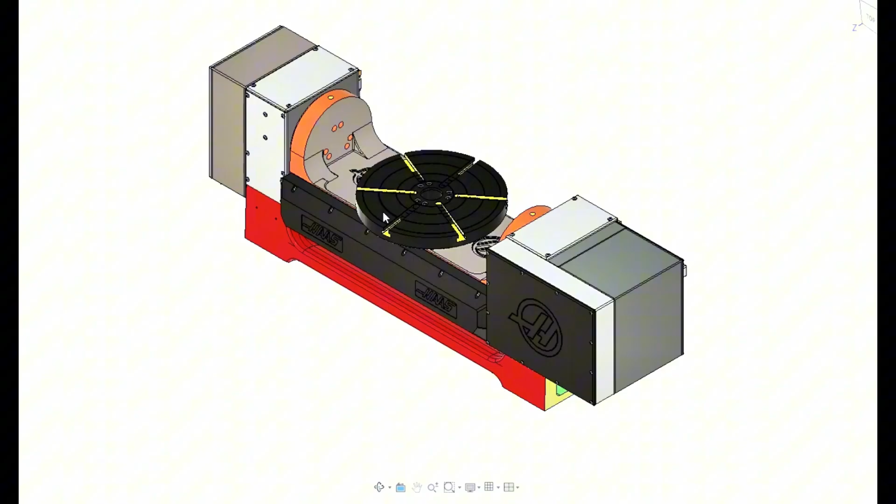The only product that I'm a little bit leery about, and can I just stop for a second and comment on HAAS's coloring scheme? Because I swear I didn't do this. This is straight off their website, and some engineer straight out of college went crazy with black and yellow, probably listening to music, and orange and red, blue. Who knows? I don't know, man.

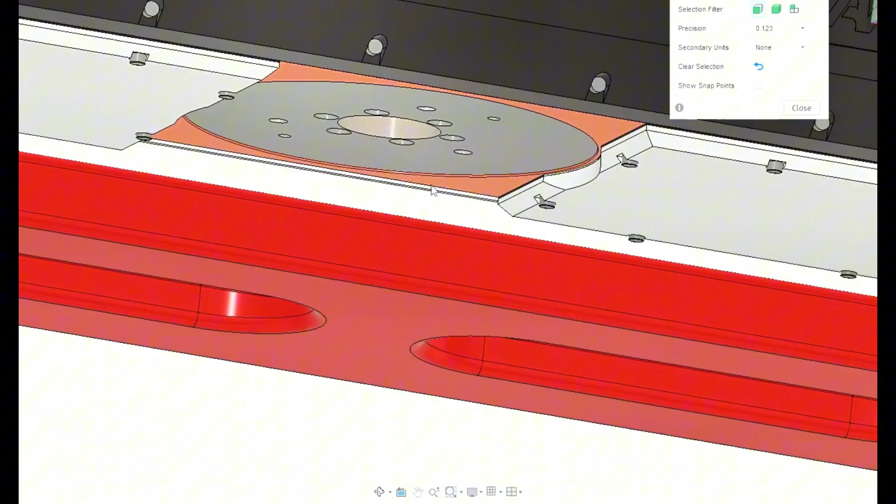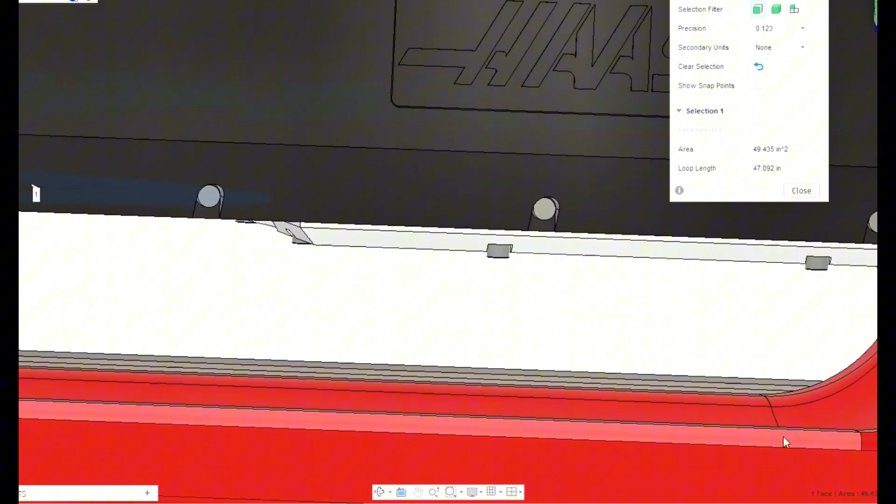Anyway, the struggle here is not the plumbing itself. It's just making sure that you have enough clearance on the backside. I think these larger ones are probably fine. So we're looking at, of course, it's angled. Why can't anything be easy? All right. Yeah. So, and it's metric. Talking a couple. All right. Got my units fixed. We're talking maybe 3 inches or just under.

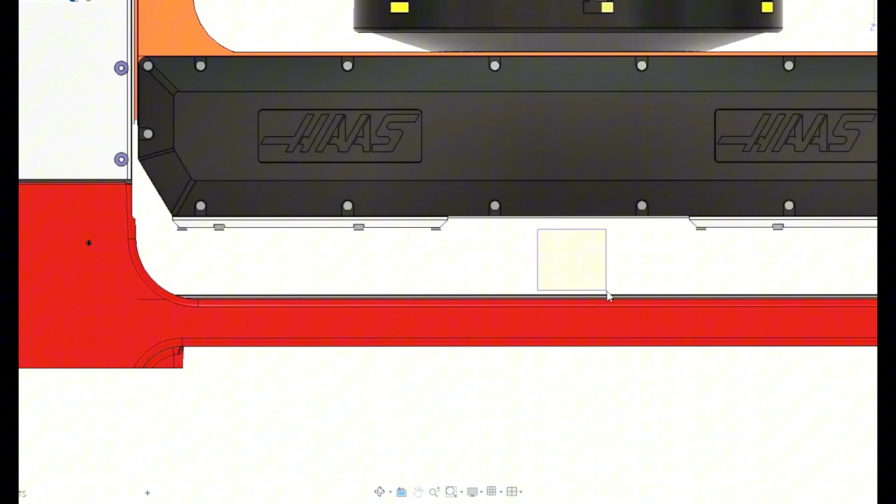So you're going to be hard pressed. Well, it might swing kind of inside of this cast diameter. So you might gain yourself a little more, maybe closer to 4 inches, but you're going to be really tight in there. But if you can overcome the space constraint, either by putting your rotary joint up inside the hole or just by keeping all your plumbing really tight, maybe zip tying or using magnets to keep your plumbing up out of the way, you could really apply the same logic that you used on the TRT series.

I guess the only real drawback here is that these do not appear to have any kind of aux lines on the side. I haven't gone too deep with these TR series, so I couldn't guarantee that's not the case, but yeah, I don't see any kind of air lines, any kind of labeled aux ports, indicating that there's air already through this trunnion.

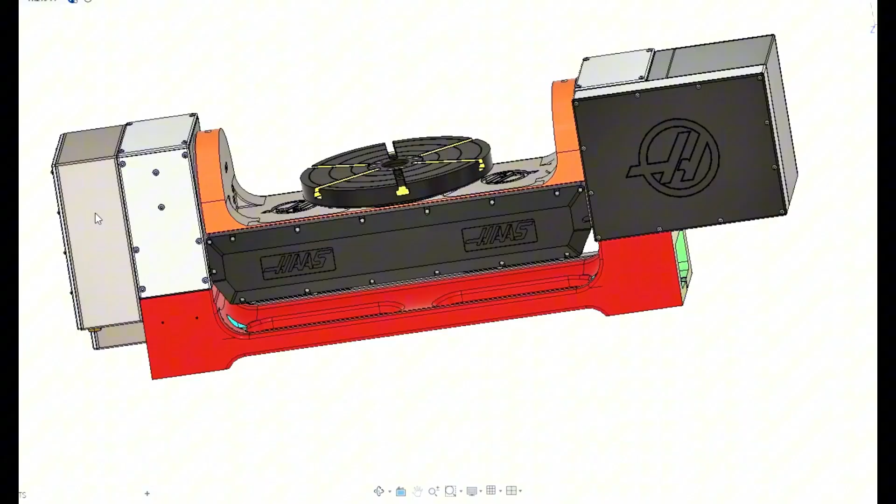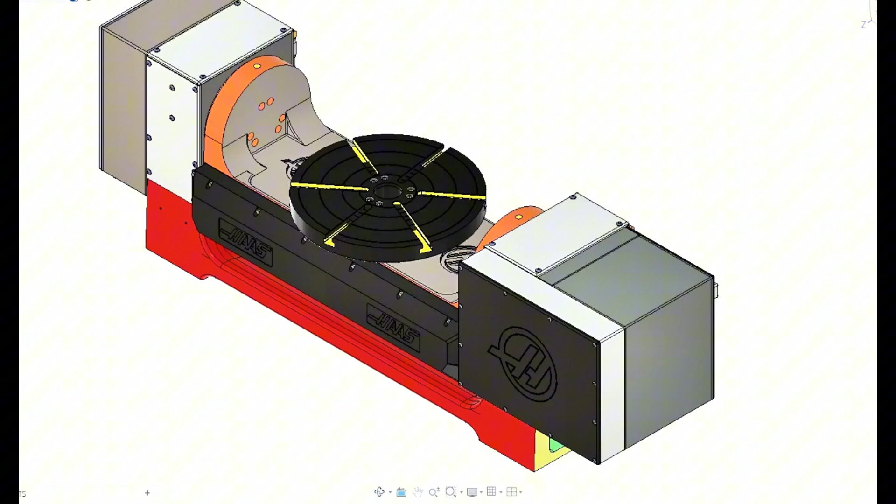But regardless, if you've got a rotary, it can probably be automated fairly easily without breaking the bank, and that really makes this product way more valuable, especially if you want to fully automate down the road and M code integrate and plug a robot in and all that good stuff. But that's HAAS.

That's all I really wanted to talk about today, guys. I hope this is helpful. If you want to integrate, I highly encourage you to go for it. It's really not that bad. I know a lot of companies are intimidated by the idea of really tearing into their machines, but the truth is that most machines are very forgiving. You can get away with doing more than you think you can, and just a little bit of automation on your shop floor will make your life a lot easier.